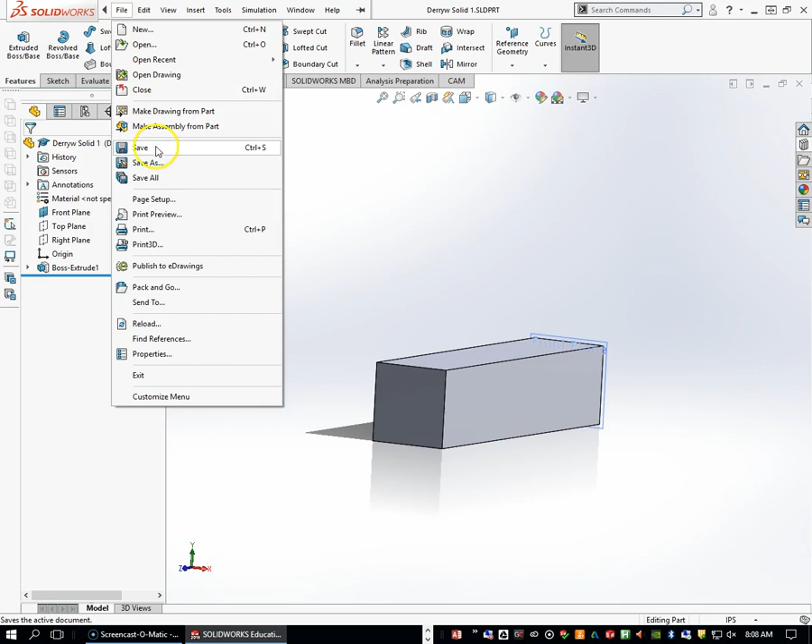Okay, this is the second video for making the burr parts for the burr puzzle. We're going to go to Open, and I'm going to open up that existing first solid that we have and immediately go to Save As, and this is going to be double knotch. Okay. Number 3, we'll call it.

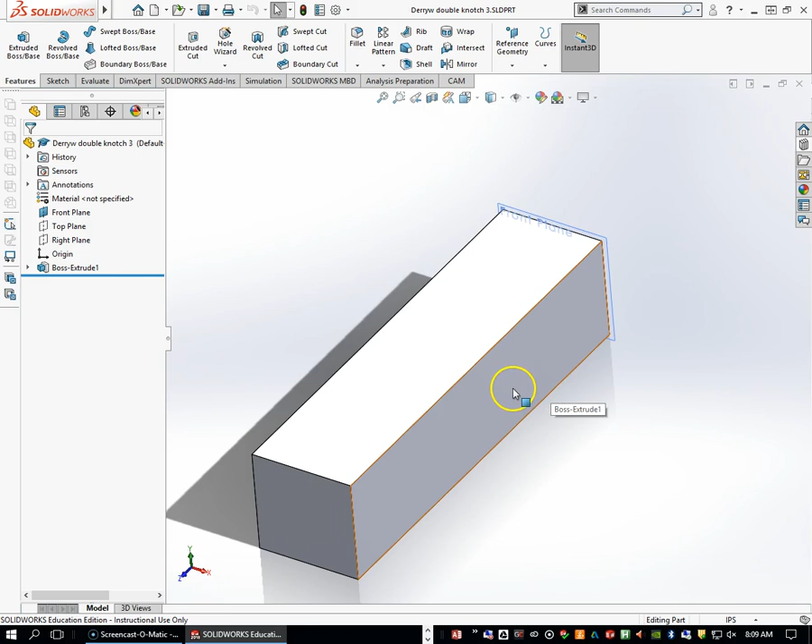Okay, so this is the third part of 4 parts that we're going to make for our puzzle. We need to put 2 notches in this one. We're going to make 2 different sketches. So the first notch is going to be on this surface. It doesn't really matter which one we pick. So I'm going to go to Sketch, select this surface, hit Sketch again, look Normal To.

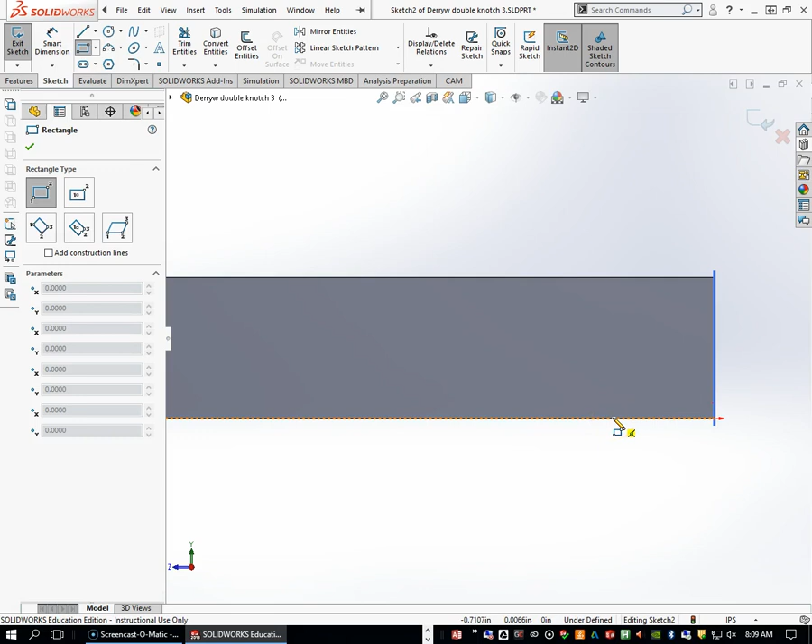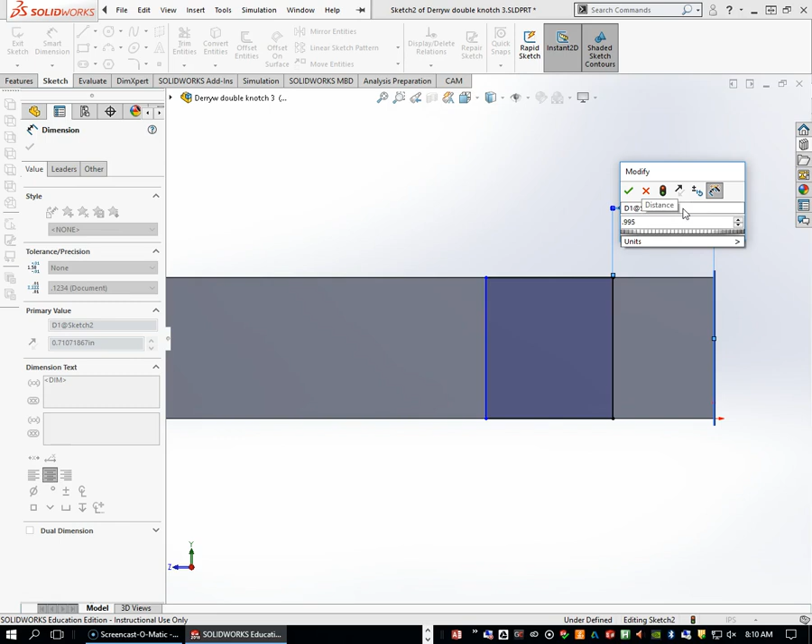All right, and I want to make a notch in here that is going to be 1 inch minus 5 thousandths away from the edge. So grab my rectangle tool, click, make sure I'm coincident with a line, click again, grab my dimensioning tool, and I'm going to be just less than 1 inch. So I want to say 0.995. We're going to be 5 thousandths away from the end. The width of this is going to be 10 thousandths over again, which is 1.01. Okay, so we're slightly oversized.

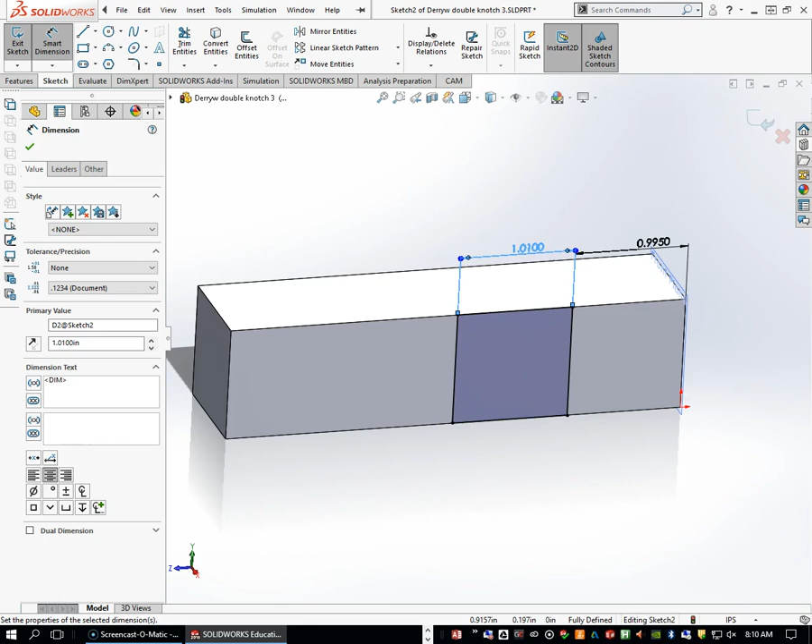And then the depth of our cut is going to be the same thing as last time. So we're going to exit our sketch, go to Features, Extruded Cut, and I believe we cut to a depth of 0.505 last time. So that should take care of that.

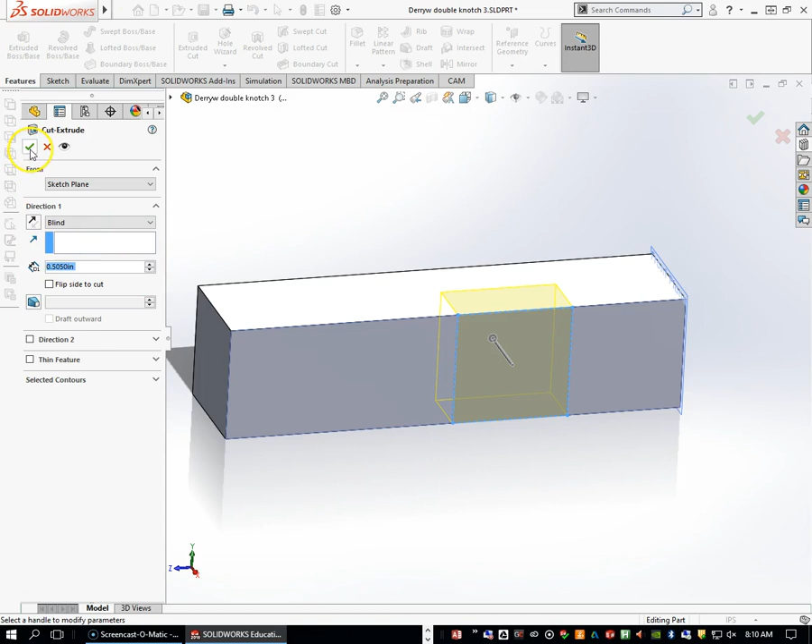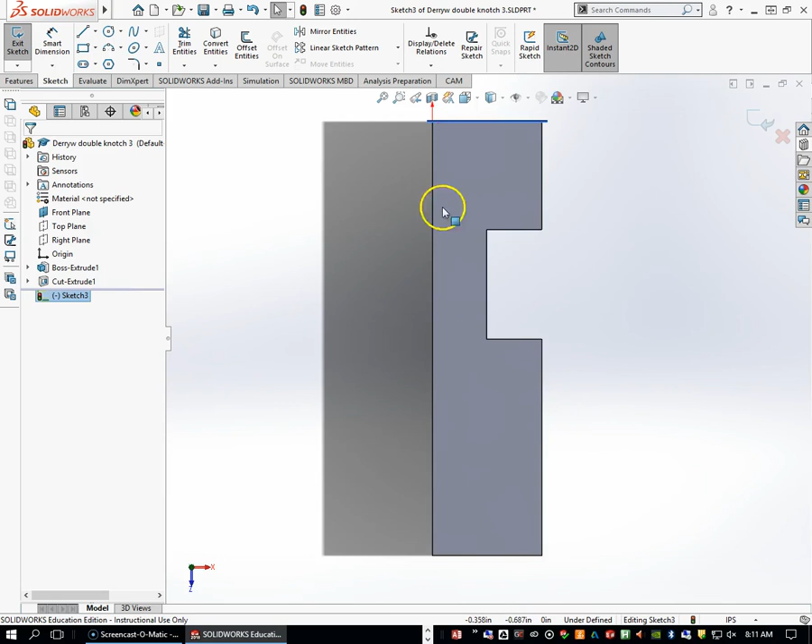We're now going to put a sketch on this surface and cut partway into this notch. So grab the Sketch command again up here, select Sketch and select this surface, right click and go Normal To, and now we're going to draw another rectangle, or square here. So we're going to click and click. Okay, we need to dimension that, and that's going to be 1.01, and then our distance from the top is going to be 1.495.

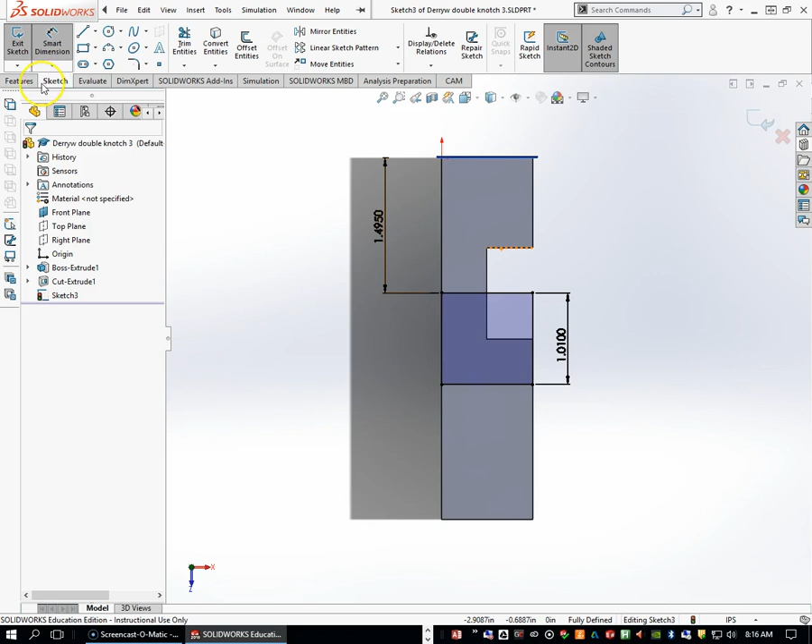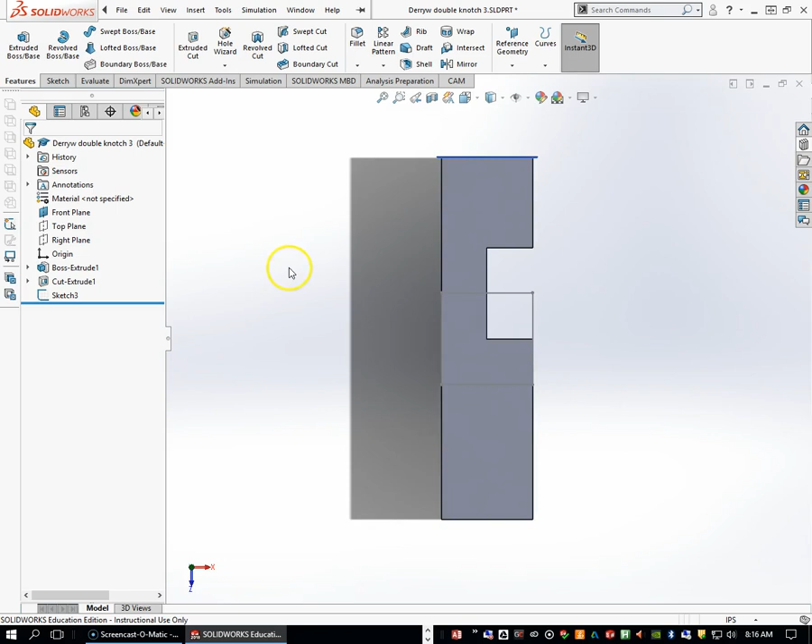All right, and we can hit Exit Sketch, Features, Extruded Boss, and we're going to flip our direction by clicking over here and cut into it. And the depth of our cut is going to be the same thing as the last cut. Hit OK. Whoops, I'm sorry, I picked the wrong command. I'm going to hit Control Z, undo. I don't want an extruded boss, I want an extruded cut. And we're going to select that sketch again, and same distance in. There we go, that makes more sense.

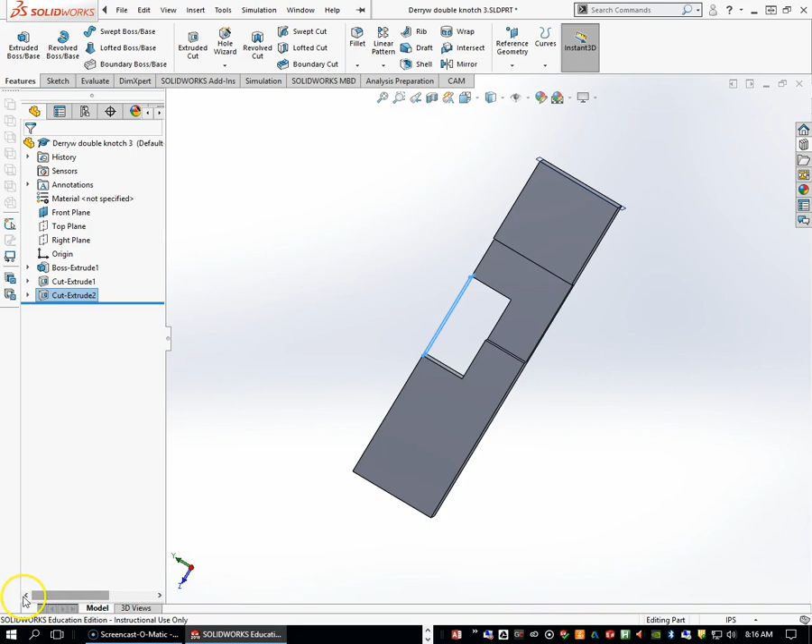All right, and we've got another part done. So I'm going to hit Save. And I want to open up an existing part that we made previously to make our final part. It should be pretty easy to do, and we should be done with all our parts, and then the next video will show you how to put them together. So I'm going to close out this part.

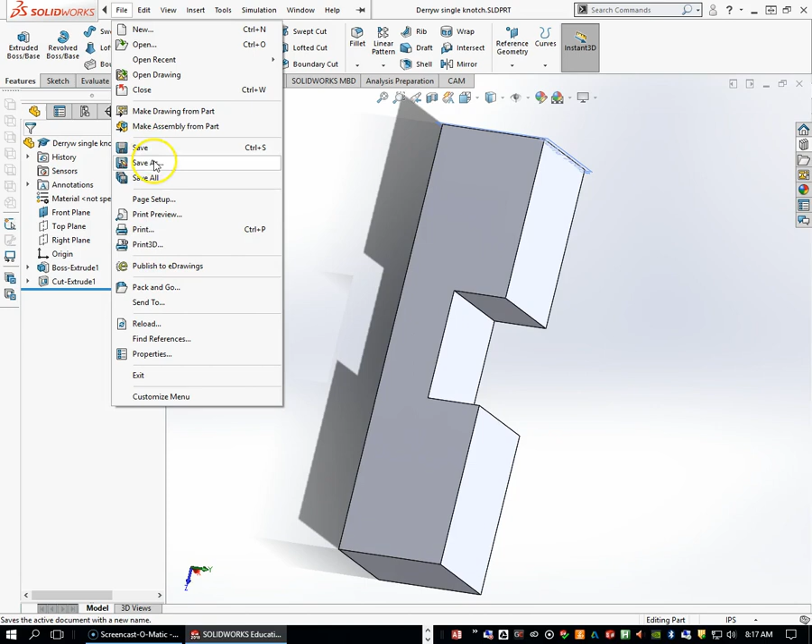I'm going to go to File and go to Open, and I'm going to open up that single notch that we made earlier and immediately go to Save As, and I'm going to call it Double Knotch 4. So there's 2 double notch pieces. One of them is number 3, one of them is number 4. And in this case, we're going to put a smaller notch along the side over here. I'm sorry, we're going to put a larger notch on the side.

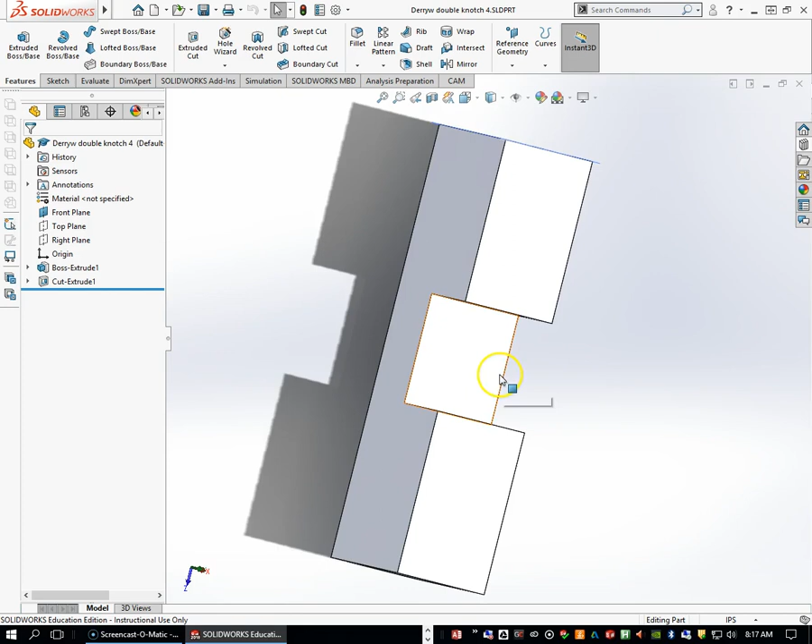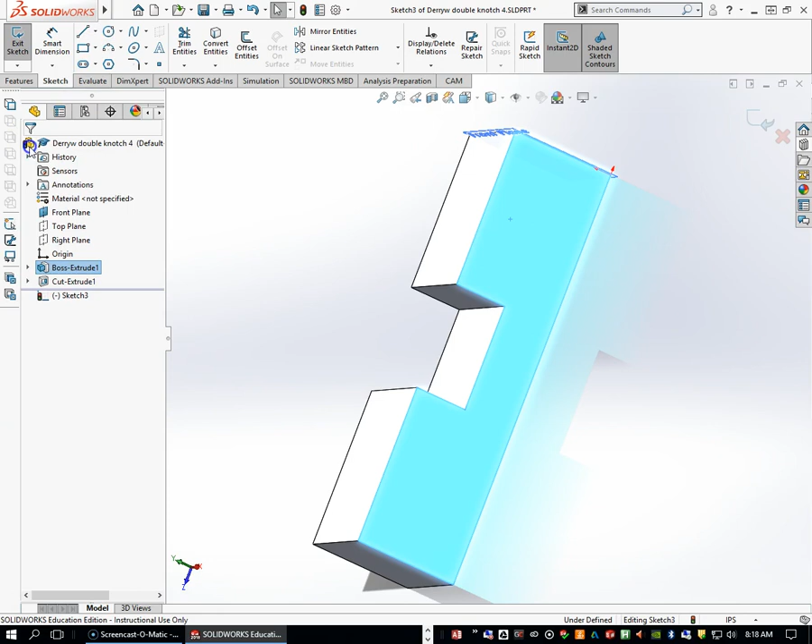All right, so I need to rotate this part over to here, and I'm going to grab a sketch on this surface, hit Sketch, and we need to put a notch in here that's going to be twice as big. So let's go Normal To, so it's a little easier to see. Grab my rectangle tool. I'm going to make it coincident again. Grab my dimension tool, and the width of this guy again is going to be 10 thousandths over, but it's twice as wide, so it's 2.01.

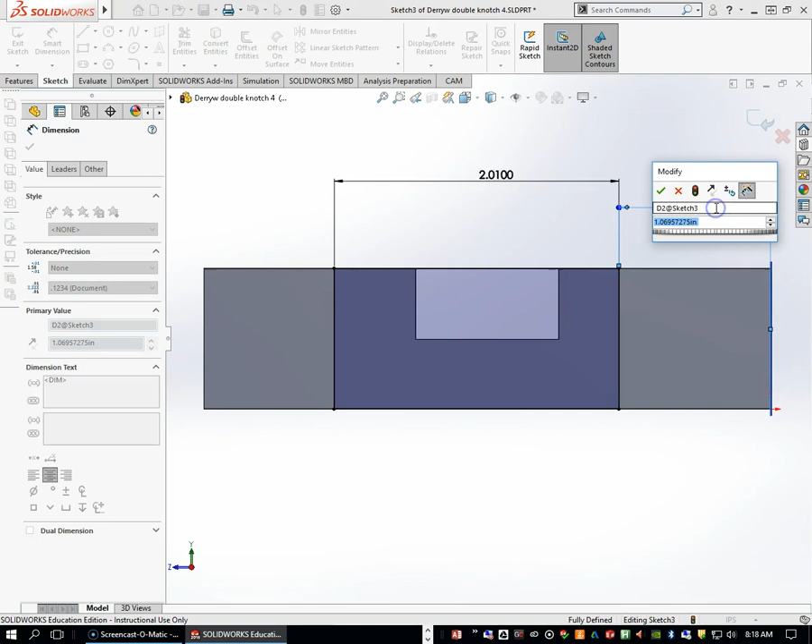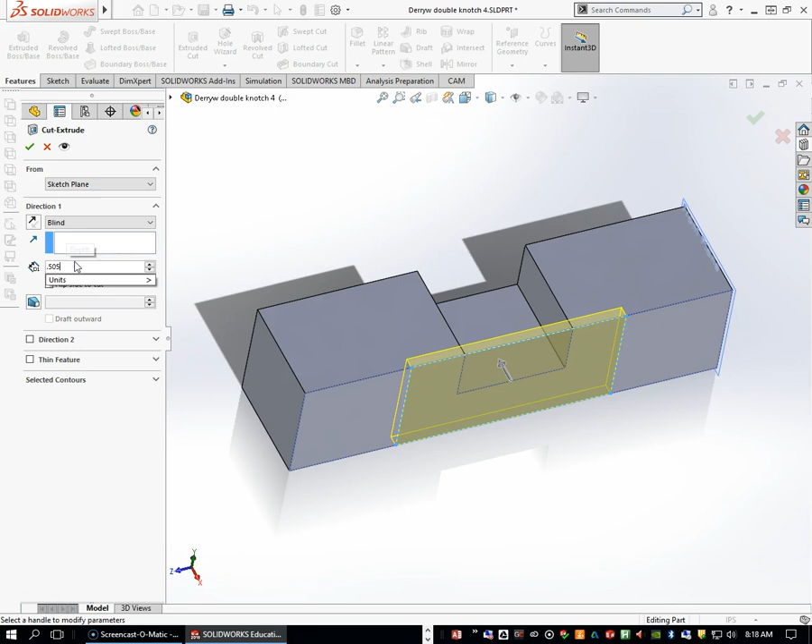And my distance from the edge is going to be just under, so it's going to be 0.995, which would make us 5 thousandths away from the edge. Hit OK. Exit sketch, Features, Extruded Cut, and we're going to go a little more than halfway through, which is 0.505, 5 thousandths extra for clearance, and we're good.

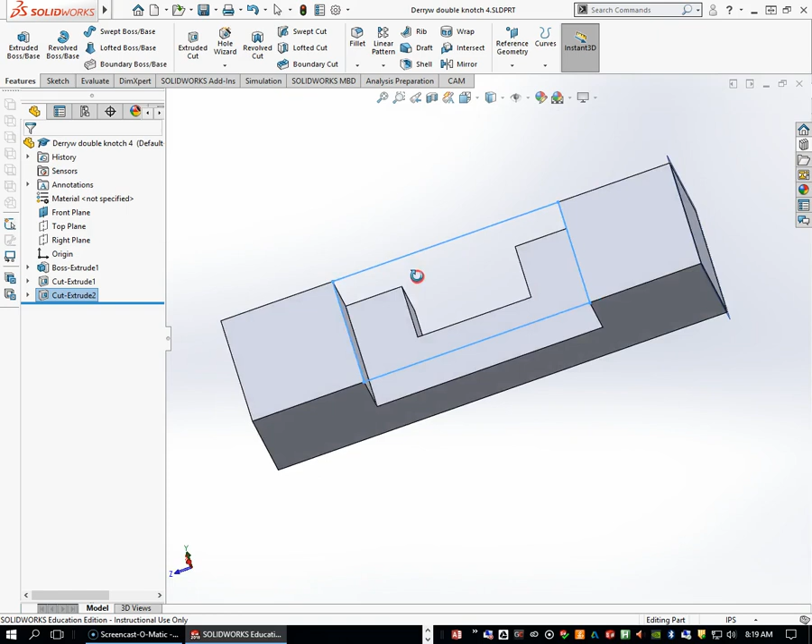So I'm going to go ahead and hit Save, and you have the 4 parts. So next I'm going to show you how to put this together in an assembly just for the fun of it. And then we're going to start talking about how we're going to go about dimensioning this part and machining this part so that we can make them on the CNC mill.